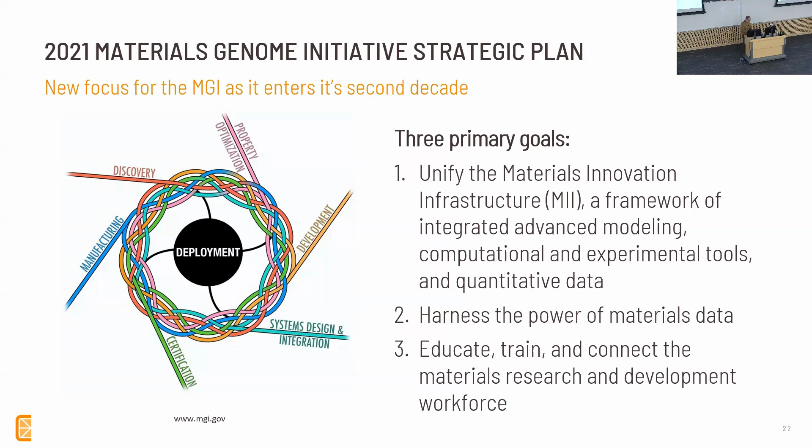And I like to throw this up because I'd like to think that our goals at Citrine tend to work towards all three of these pillars within the MGI. So I'm going to talk today about a couple different things. First is, what the heck is Citrine? I'll put my business hat on and talk about the elevator pitch for the company.

I'll talk about some commercial use cases for AI ML within our portfolio of customers that we're able to actually disclose. And then I'll talk a bit more about the work that I've been doing with my group on academic use cases, working with universities and national labs and government-funded programs, and then some conclusions.

So a little bit about Citrine. We are a company that does AI and machine learning for materials and chemicals. We're developing tools to help other organizations like Boise State or like 3M or like Pacific Northwest National Lab or Idaho National Lab to do these kind of calculations and analysis at scale. So we provide basically machine learning and AI for materials and chemicals as a software as a service or SaaS platform.

And the idea is that can we use the experts within organizations and the expertise within organizations to accelerate product development by giving them the tools to be able to do these kind of informatics tasks basically as part of their day-to-day projects.

And so what are the impacts for using AI ML within materials and chemistry? Developing better, more sustainable products, developing products faster, improving supply chain resiliency. If a chemical suddenly we understand to be toxic, like PFAS, how do we very quickly reformulate things in order to improve performance, but while also acknowledging regulatory restrictions.

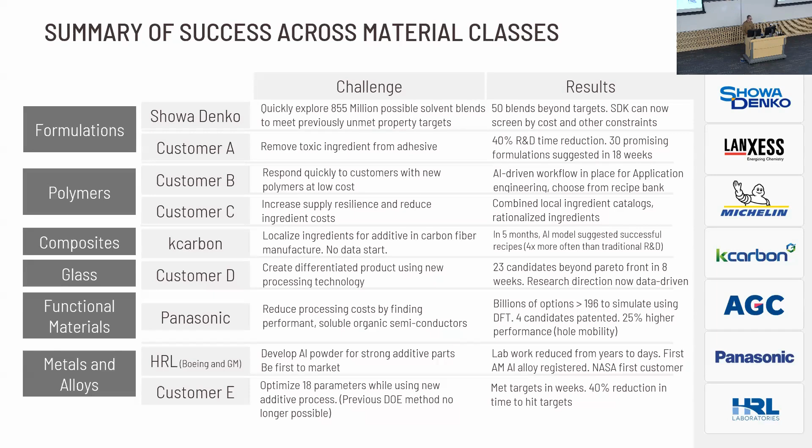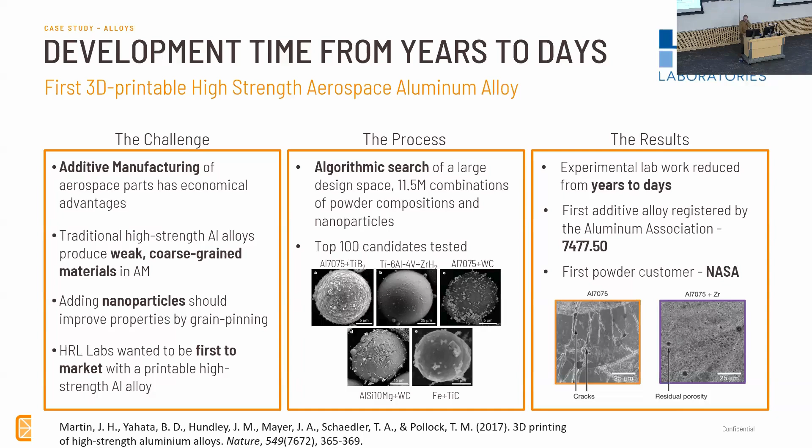We had another program with the Colorado School of Mines and their TARDEC Center, which is the Tank Automotive Research Development Engineering Center, about making door hinges for armored vehicles. They were breaking out in the field. It's a big deal because if your door doesn't work and you're in a tank, you're exposed. And it would take up to 2 years to get the new tank to the field. It's a logistical nightmare.

So the idea was, can we print something at the front lines and just throw that in there? So the challenge was figuring out what the optimum print parameters are for new alloys at the field based on what they would have available at hand and at the front lines. So we developed models to be able to predict for a given machine type, for a given powder type, what is the best parameters, your knobs to turn on your print machine so that you have the best performance, something that's good enough for a hinge.

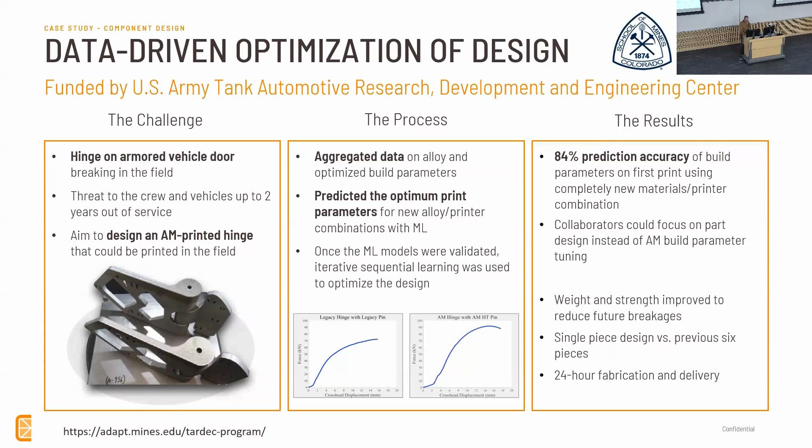And we were able to do this pretty quickly with 84% accuracy on the first builds of these runs. So you don't have to waste a lot of time building a lot of test coupons first. You just go straight to building the part you need. So we were able to reduce the weight and improve the strength of these hinges as well by doing topology optimization for these pieces. And so 24-hour fabrication delivery from 2 years is a pretty good improvement here.

And then the last of these commercial applications is this program with a tool company where they wanted to improve mechanical performance of some coating technology that they were putting on top of their tools. And they thought that additive could help them with that. The problem was, of all things additive, it's a very complex manufacturing process. There's a lot of ways you could optimize things, a lot of knobs to turn, basically. And it was very time-consuming to test. Each one of these tests took a couple of weeks to do one set of build parameters, and you've got thousands to choose from. So before they met us, they weren't able to solve this problem.

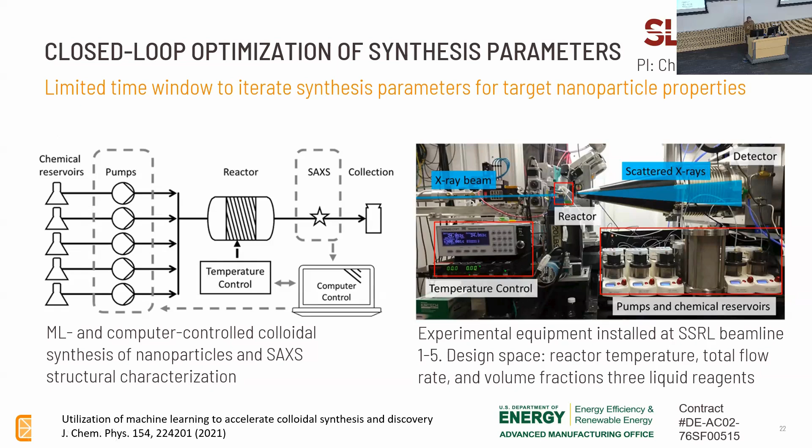So in this case, they had a couple different design space parameters that they were trying to optimize against: reactor temperature, the flow rate, and 3 different liquid reagents, so 5 dimensions. How can we very rapidly test this and assess what the optimum is within 2 days of this beamline access?

So again, this is all published, but these are the figures that show, as a function of the experiment number, how the sequential learning did in terms of finding this optimum. So these are 3 different metrics that they were trying to optimize simultaneously. And with our software and with most of these methods, you can do multi-parameter optimization.

They were looking at the sigma, which was the particle size distribution. So the smaller that is, the narrower the distribution is, the closer it is to a delta function. The particle radius, you're trying to hit some kind of particular target size. And then the intensity, which is equivalent to the particle yield, and you want to minimize that.

So the first couple of experiments were just initialization. You need some data to train a machine learning model. And so we took the first 16 of them just to be like a grid search to initialize the training set.

And then we turned on sequential learning, with a vertical red line there after the 16th experiment. And you can see very quickly it's able to latch on to making very small sigmas. It took a while to get to the target size, but we got there, and then minimizing the intensity there simultaneously.

So this was an example of real-time machine learning in order to be able to do automated experimentation, which is a very, very compelling use case for AI/ML right now, because a lot of people are trying to explore how do we automate self-driving labs and things like that. And machine learning and AI is necessary, in my opinion, basically the brain in order to be driving these kinds of labs. That's on the software side.

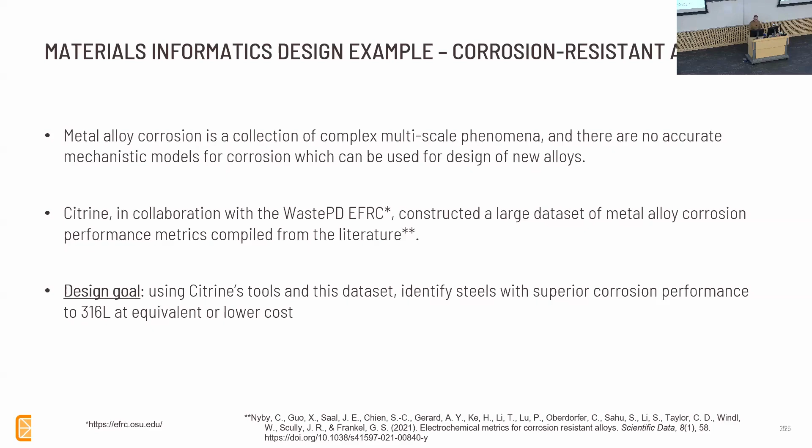But now we can actually design a corrosion-resistant alloy if we have a data set like this. So we worked with the EFRC, we made the data set, and we came up with a hypothetical design goal of, I'll use the mouse here. Using our tools, can we identify a steel with superior corrosion performance to 316L, which is a very common, very widely used stainless steel, at an equivalent or lower cost?

So to do that, we developed a modeling workflow, a machine learning model architecture that had a bunch of inputs, in this case temperature, the pH, the chloride concentration. So those are the measurement metadata, if you will, the conditions for your corrosion metric. Of course, composition as well as an input. And then we took a lot of CALPHAD predictions.

CALPHAD is another kind of simulation tool that you can add on top of this to give information about the microstructure of these materials. As we all know, microstructure is important for materials. So things like, what is the matrix phase? What is the composition of the matrix phase? Are there precipitates? If so, what percentage of the microstructure is made up of precipitates?

Things like that. We also integrated DFT, which is an atomistic quantum mechanical-based system of simulating properties, in this case things like surface energy, cohesive energy, band gap. And then we also looked at PREN, which is a very simple rule of thumb kind of model for corrosion engineering that a lot of engineers use out in the field.

And the idea was we could bring all this stuff together and put it all into one model in a way that maybe a human would require a lot of physical intuition or even a PhD thesis or two in order to be able to figure out how these models all interact with each other correctly. But with machine learning and an acknowledgement that we're just looking for the needle in the haystack, we're not necessarily looking for the complete story of how to get there. We can find the correlations between all this input data as quickly as possible using machine learning to find out what is an optimum output here.

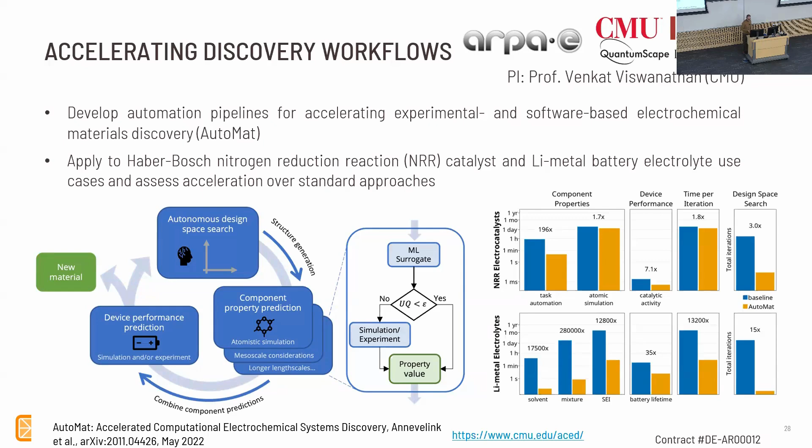So Haber-Bosch is basically a problem with regards to catalysis about the generation of ammonia. And Haber-Bosch is actually responsible for 96% of ammonia throughout the world. And it supports about a third of global food production for 2.5 billion people. It's a very energy-intensive process, Haber-Bosch. And catalysis is basically the only way we have in order to be able to reduce the energy input for this process.

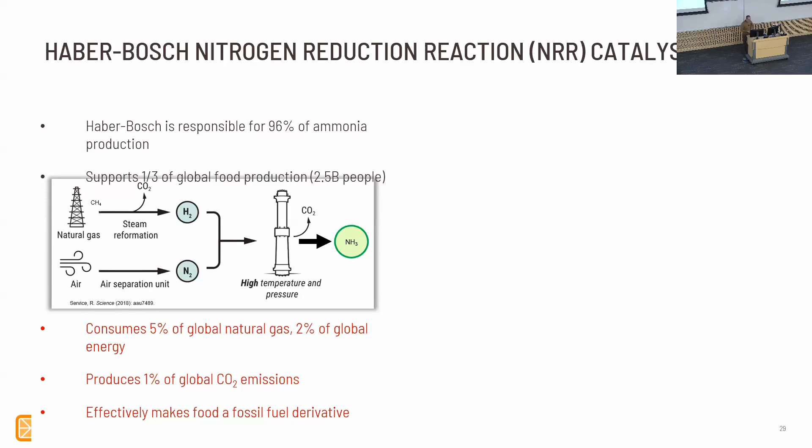So it consumes 5% of all global natural gas, 2% of all global energy for ammonia production, and is responsible for a big chunk of CO2 emissions. So that makes food essentially a fossil fuel derivative because we rely on fossil fuels so much in order to be able to perform this process. So there's a lot of work towards trying to create better catalysts for this particular application.

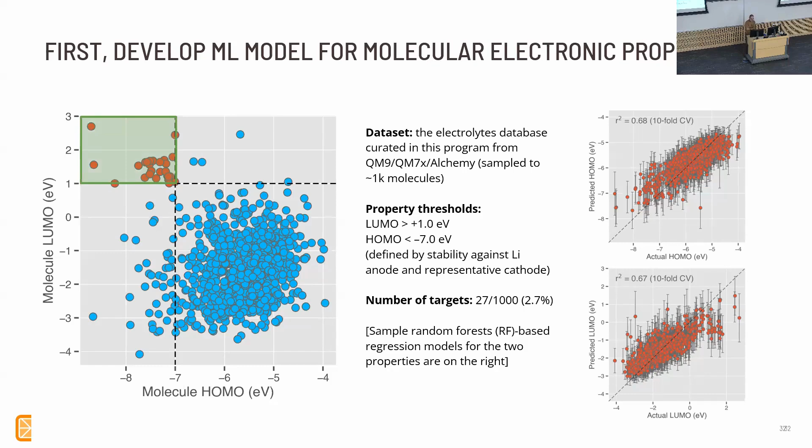There you go. And we were able to make some models for the good HOMO LUMO, basically. And this is against the entire data set. And you can see that we do a pretty good job of predicting within the range that we care about here pretty nicely. But that's the first step.

Now that we've got a model, how do we generate new candidate materials? And that's difficult within the molecular world, because you can put balls and sticks together for molecules willy-nilly, but you don't know if you have a good one or not. You can create a lot of non-physical or completely non-synthesizable materials very easily. So how do you whittle down the billions of potential molecules, probably infinite, to something that makes sense and that is calculable and even synthesizable?

So we made this large workflow here to try to find these lithium metal battery solvents. We basically took the good solvents in this first step. We found 27 that were known to be very good molecules, basically the stuff from this plot. We broke them down into their constituent subcomponents, fragments, we call them, and there's a method called BRICS for decomposing these molecules into these fragments.

And then you take the fragments of the good molecules and you just recombine them like Legos into new molecules. And this kind of combinatorial assembly allows you to create a large pool of new molecules that hopefully are going to have some character of the good stuff that you started with, while also having some novelty to them that are going to outperform the known things.

Then using these new candidates, can we screen them based on various metrics we'll show in a minute for synthesizability, suitability, are these physical, using our HOMO and LUMO models now to see if they're any good. And then taking this, what is the final bit of screened candidates that can then be used as part of an experimental study.

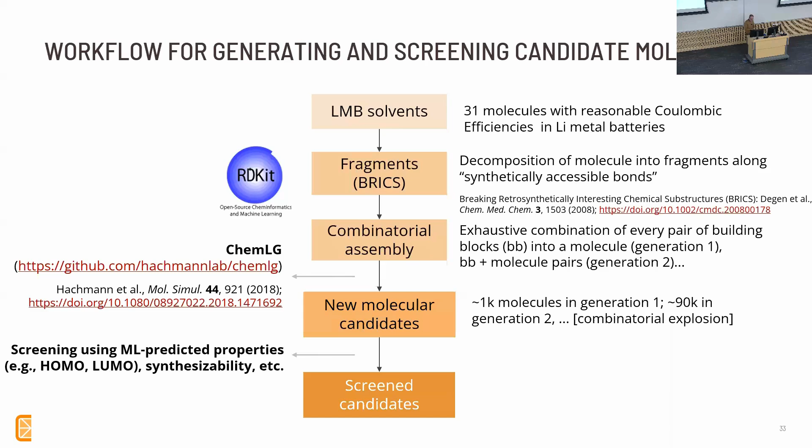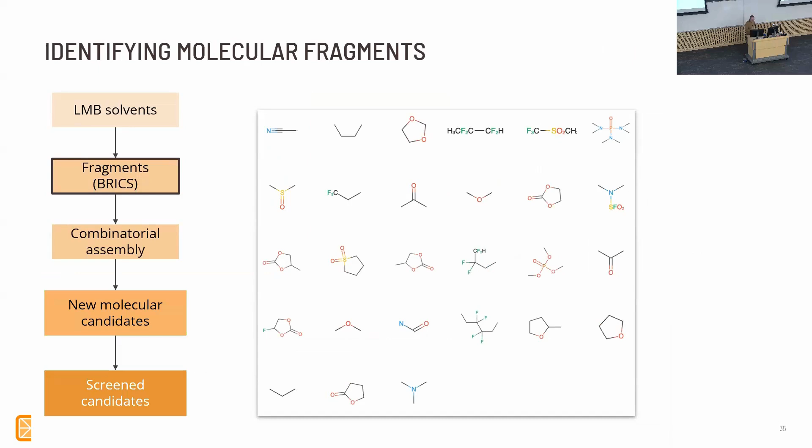So just walking through this process, here's the pool of good molecules that we've started with from that first plot. We broke it down into a bunch of fragments. So these are the constituent fragments that created these good solvents. And then we just combinatorially developed new ones, and this is just a sample of them. And then we screened them by going through how many of these, let's say 900 or so molecules, have a HOMO less than negative 7.8 and a LUMO greater than 1.

And then of these, we ran some very simple calculations and simulations on energetics, like what are their total energies based on things like steric hindrance and whatnot. You can rule those out, or dangling bonds or things like that, and synthesizability. And then we ended up with a pool of about 59 that were able to pass all these screens. And now we found basically the likely needle in the haystack with this process.

And so we did do some experimental optimization of these electrolytes. So the challenge for the electrolytes is that it's not just the molecule, but it's the molecule plus a bunch of other stuff, salts that need to be mixed as well to optimize performance. And so this is where we then worked with a group at Carnegie Mellon who had an automated experimentation lab where we gave them basically the set of molecules that we wanted to look at.

They took those molecules, these solvents and salts, and then they optimized within those using our machine learning models for performance. What are the best of these materials for the given molecule? What is the optimum electrolyte? And that's the thing you want to try to put on that plot to get the Coulombic efficiency, not necessarily the molecule itself. It's the collection of that with all these other ingredients.

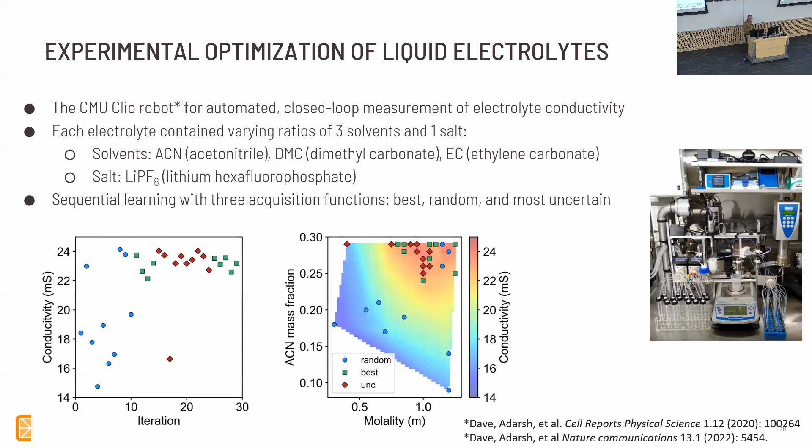And the idea was now in an automated way, without a human in the loop, we could find out what is the best within this space that we were mapping out here with our underlying model. What is the best composition to use? And then that's what we were comparing against other materials.

Okay. I think I was targeting 40 minutes.

I'm pretty much there. So in summary, these machine learning and artificial intelligence methods can be really transformative, I think. They create these new classes of predictive models. I'm being very clear with this, I don't think they're as good as or will ever replace physical models when available, but where we don't have physical models, I think they are very, very useful for complementing these models within design workflows. They provide this kind of efficient design of experiments approach.

This has really been the killer app, if you will, for our commercial customers. And within the academic world as well, it's been really critical for us to be able to produce this kind of functionality and allow it to be used throughout the university system with all of our collaborators. It has been pretty great to see. And integrating these tools with new and existing design and modeling workflows is, I think, going to be critical for us in the future. A lot of my proposals, including the one I just wrote with Lon, are working on trying to do just that.

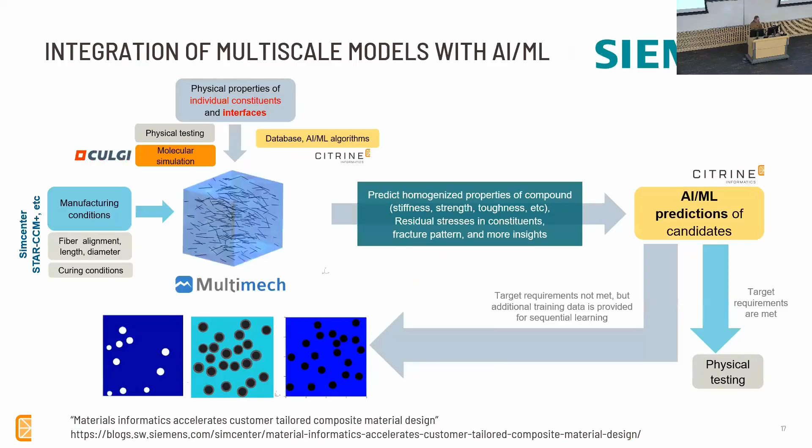But you touched on a larger problem within the machine learning community called interpretability and the black box problem, right? You want something more than just a model that tells you this input yields that output. You want to know why it's predicting this output. And we have methods for trying to shine some light into it. I don't think any method's going to completely expose the box. I think it's just the nature of the empiricism of this model that it's really hard to do that.

But we do have methods. I'm going to go to my alloy example because that's where I can explain things. Maybe you can say, okay, for some reason, unbeknownst to the model, but for me, I know why, it's materials science, the model really is correlating chromium content with pitting potential. That is, of all the inputs, and there's a lot of inputs, chromium content is the most important. It accounts for 80% of the variation in my output.

And it's information like that an expert like yourself can go back and figure out why that was. Now, for chromium, that's a poor example because we all know why. It forms a scale of chromium oxide on the surface of the steel, and that's why it's able to affect the pitting potential. But what if it said it's something completely different, like niobium, and you're like, whoa, niobium doesn't form a scale, but it's having a big effect on corrosion. Why is that? I never saw that before. And that could be an excuse for you to go in and try to understand more about that.

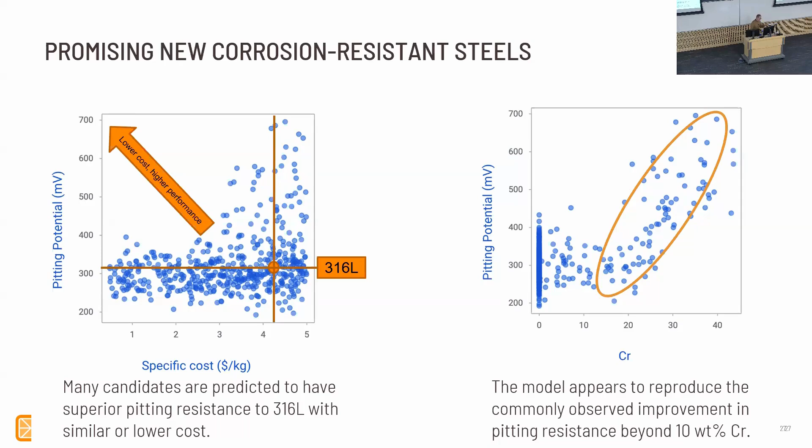And the other angle to this is something like PREN is a physical model in a sense that it's entirely empirical, built on years of experience from engineers that know these particular physical features matter in terms of corrosion performance. And we can integrate that as well to do a better job of maybe finding better coefficients for the very simple linear model they were developing, utilizing these kinds of machine learning tools. So sometimes there are ways to inform things in both directions like that.

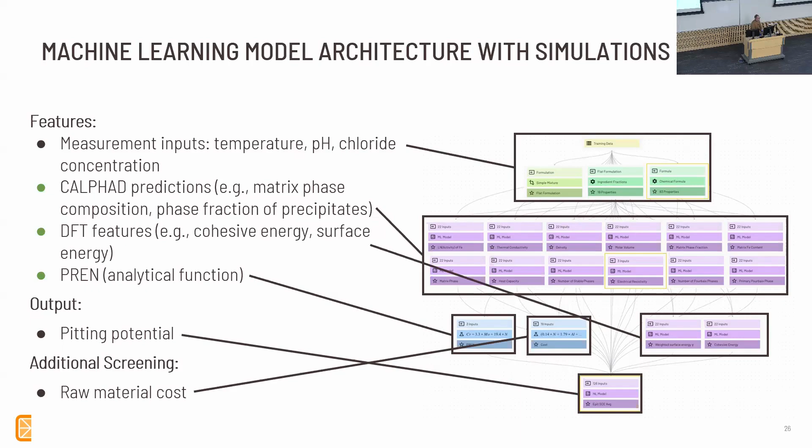Great, thank you. Just another comment though, the hole mobility, the difference is a factor of 5 there, I noted in one of your earlier slides. The hole mobility one, this one? Yeah, that's a tremendous boost. Yeah, it doesn't look that impressive from here, but most people look at this on a different scale. This was actually a pretty important discovery for us. Right now this is all just DFT, but they have since experimentally validated it, and it was a very interesting, very impactful result for us.

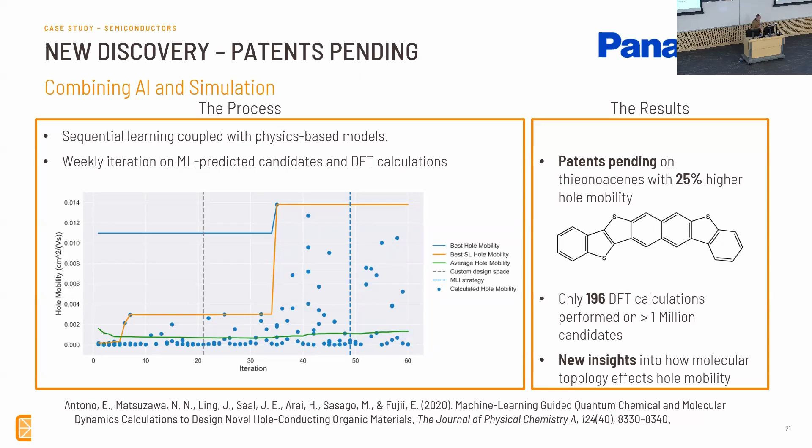Hello, great talk. Kind of similar to the previous question, I'm curious about the error bars in your earlier graph. If everything's a prediction, how do you know how confident you are in the prediction? So if you want the actual math, it's all in those papers on the bottom. But at a very high level, we use random forest models for our machine learning. There are a couple of reasons for that, and I can have a conversation afterwards about why. Part of the reason is that you are able to come up with uncertainties, and the source of that uncertainty is basically self-consistency of the prediction.

So let's say I have 100 data points and I train the model on 100 data points. I could also take 20 out and train on 80. I can take a different 20 out, train on a different set of 80, and so on. I could do that 4 times, or an infinite number of times. And I get a set of models. How much do those models actually agree with one another? So you're looking at how well this series of models all agree on the prediction of this point in particular.